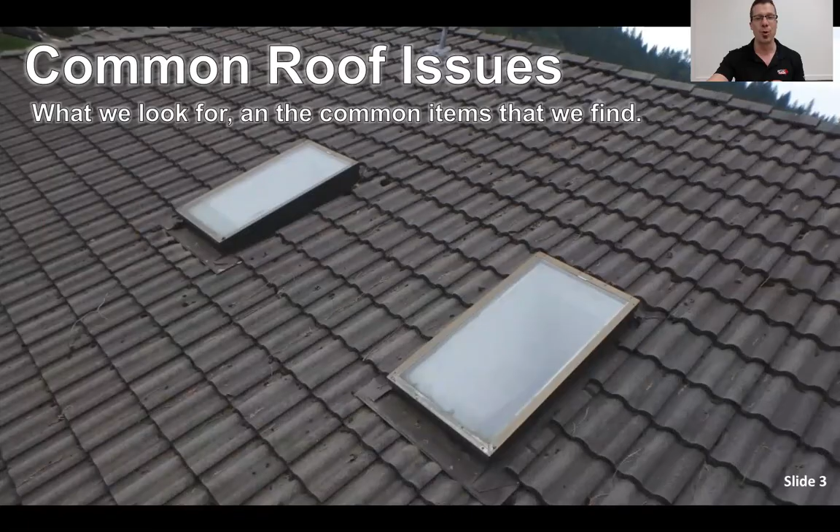So let's start with the common issues found on the roof, and let's learn a little bit about it. When you look at a roof, often all we see is the covering, but there are plenty of components to this roof: all the penetrations such as the skylights, the chimneys, all the vents. There'll be plumbing stacks, venting from your kitchen fan and your bathroom exhaust fan, but we're also going to talk about the gutters, the internal built-in style or the external one. We'll be talking about caulking as well, and also issues we find on brand new roofs.

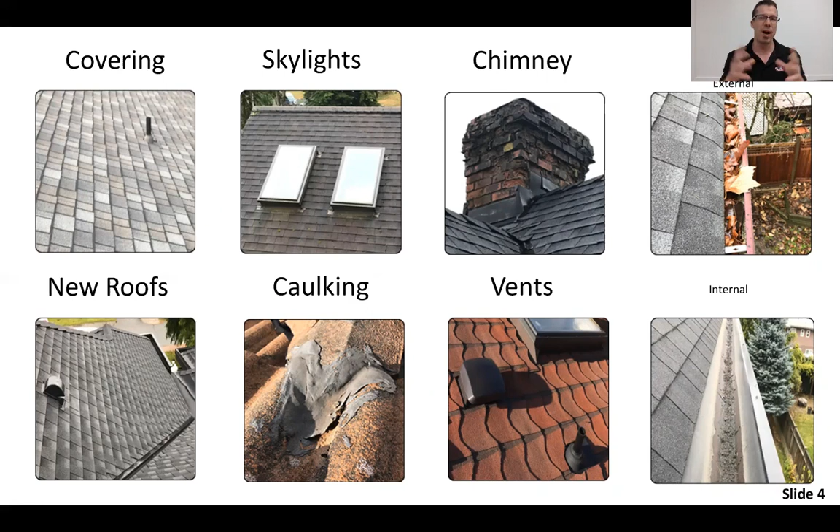But first, let's start with the skylights and penetrations. So let's look at this first video.

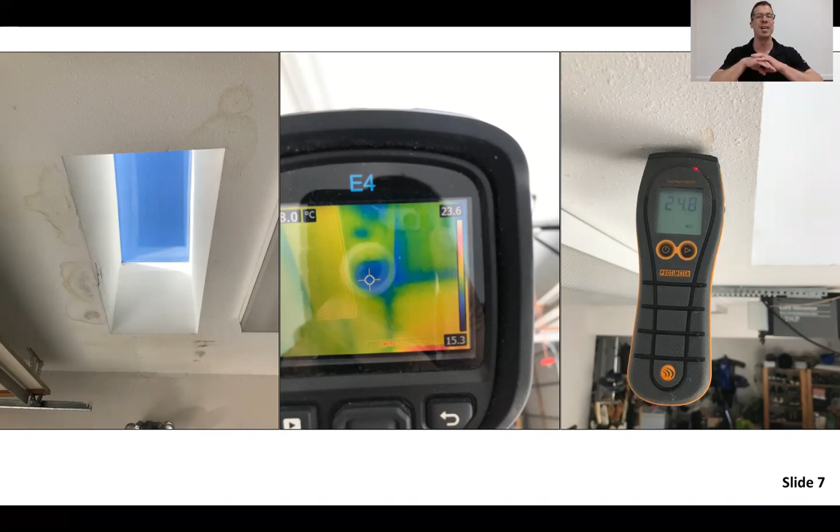So when we do our home inspection, we always start with the outside and then the roof. But once we get inside, that's when we can really see if there are any issues. On the left here, you can see in that picture that there's obviously water stains around the skylight. But is that old? Did the caulking they put up there fix that leak? Maybe, maybe not. So then we want to check it out with our infrared camera to see if there are cold spots. As you can see, there's definitely some cold spot where the blue color is. But that could also be a lack of insulation up there — insulation on skylights falls over all the time. Then we finalize this with our moisture meter. We stab the drywall, and it obviously shows us that it is an active leak. It is fully wet right now, and that will need immediate attention. So that always goes in the report.

Now let's take a look at this next video. I'm here on this roof, and I'm looking at these skylights. First of all, they all have moisture between the panes. Not the end of the world — it's an old skylight, it will happen on every skylight. But what I wanted to talk to you about here is this.

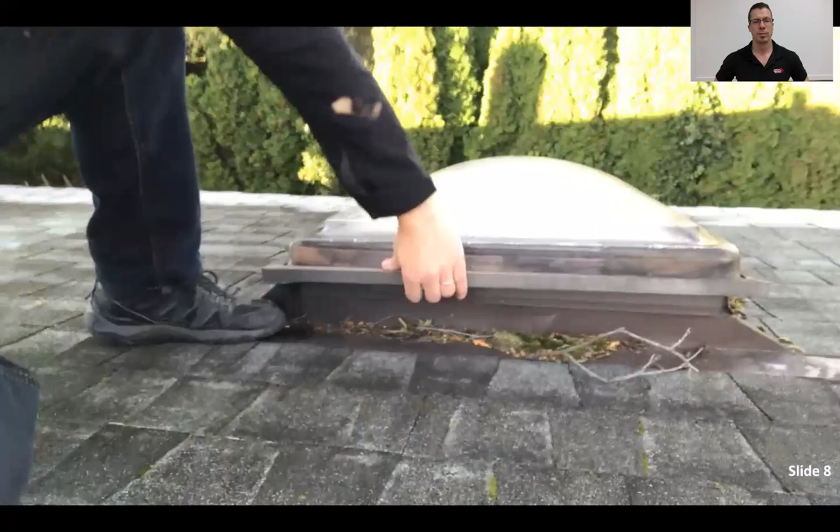We've heard stories that in really bad windy weather, if someone opens the door inside, these could pop right up and fall off, kill somebody. It's definitely dangerous, but it's a super easy fix. You just need to put two screws on each side right through the flange there, and now it'll be nice and secure. It's unfortunately a very common problem that we see on roofs, and it shouldn't even be.

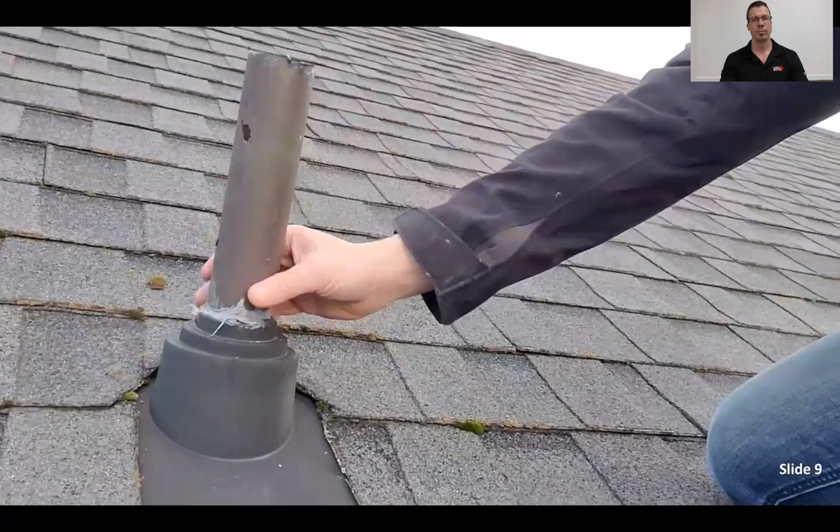So in this next video, let's learn a little bit about plumbing stacks. I'm on this roof here checking all the penetrations, and here we have a plumbing stack. At the time of construction, this was coming off the roof, then they put this rubber thing here that we call a boot. It goes from the top, it's kind of pressure fit. Some guys throw caulking on it, but normally you don't really need to do that. Then you put your shingles around it, and it's all waterproof.

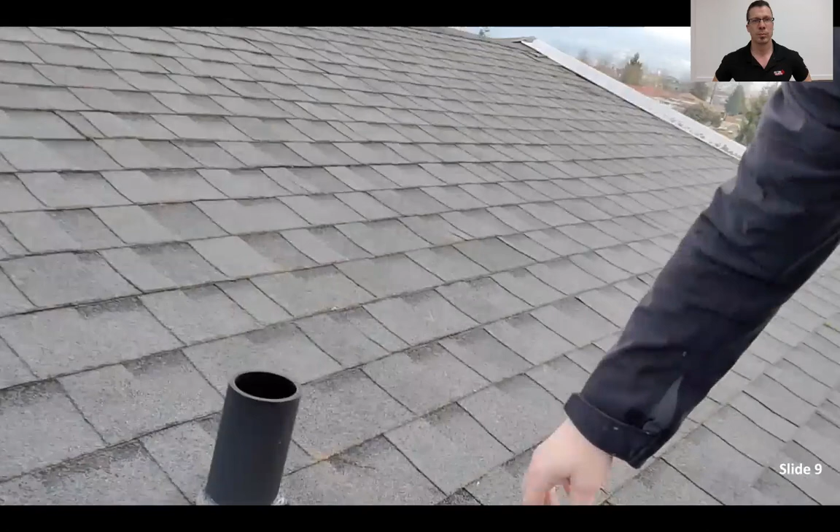But when you come to this one here, you can see that the boot is completely deteriorated. There's a hole right there. There's absolutely no doubt there's water getting into the attic from this.

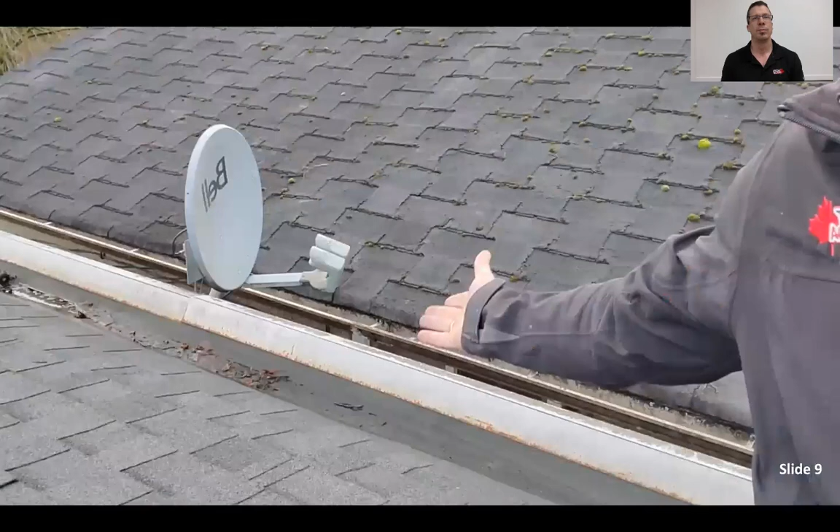So this is a really good reminder that once a year, go on your roof. Here the pitch is basically super low, so it's very safe to walk on. Go on it, see if the gutters are loaded with garbage or water standing in there, if your boots are in good condition, if some of the shingles flew off in the wind.

Very important - if the homeowner is either elderly, maybe afraid of heights, or just doesn't want to get on the roof, it's very important that they get someone up there. Most importantly, find someone that is not a salesperson. You send a roofer up there, he'll tell you you need a new roof. But if you ask a home inspector instead, we have absolutely no gain or loss whether you replace this roof or do any kind of repairs. We're completely unbiased. We can go there, check it out, and give you a full report about that roof.

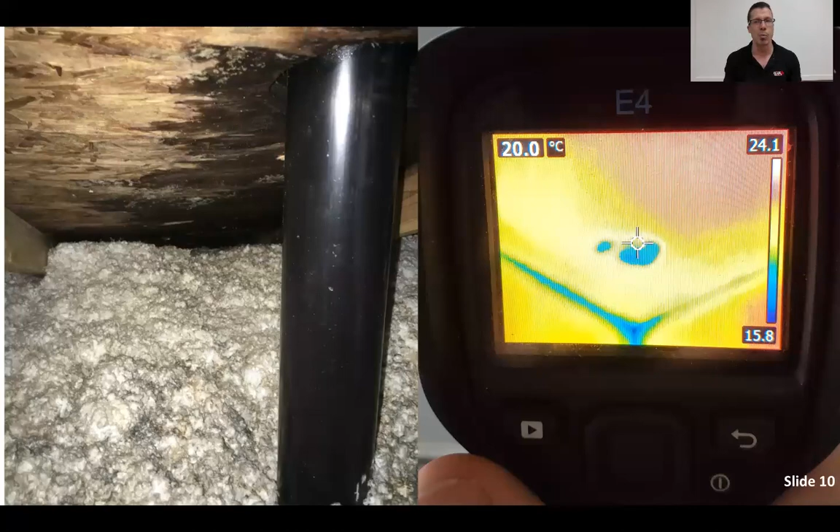Now, once we get inside, I'm checking in the attic. I can see that this plumbing stack is obviously leaking. The sheeting's absorbing most of this water, and that will turn into mold in no time. The dripping that happens once in a while when it's raining, the insulation is absorbing a whole lot of it. But we can see on the right with the infrared pictures that it is starting to create a cold spot. There was absolutely nothing visual on the ceiling there, but with the infrared camera we could see it. So keep in mind, we use the right tools.

Now, chimney issues - chimneys do come with a whole bunch of issues as well, so let's look at this. I'm here on the roof just by this chimney, and I wanted to give you a little bit of information about that. We always like to see a chimney cap, sometimes called a rain cap. There are many benefits to it.

One is that it prevents water from getting inside your chimney and rusting the metal damper that's down there. They can also come with a mesh around it that prevents animals from getting in there, or bees or anything like that that could create problems. But one really good feature is that if it's really windy out there and we have a downdraft, it can always push the smoke back inside the house - but if you do have a good chimney cap, it will prevent that.

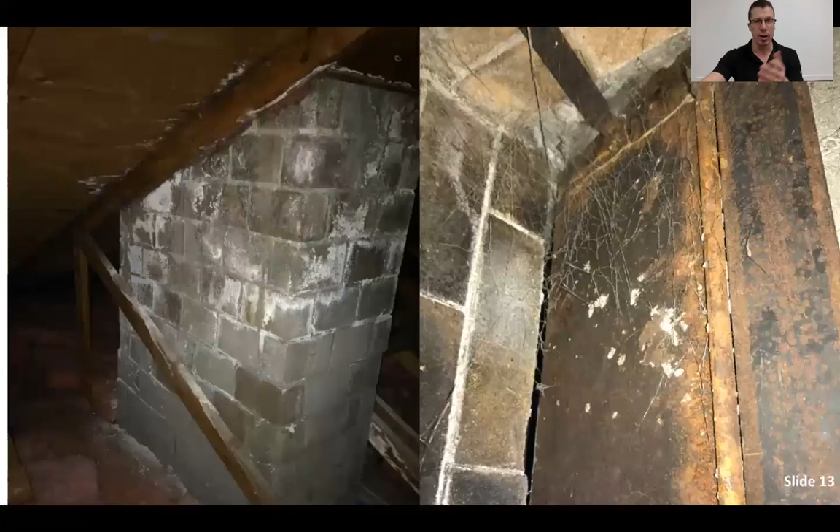So as is right now, we see chimneys like this all the time, and we'll have to put that in the report to add a chimney cap. What's happening is I find that often these chimney caps, along the years, will start rusting. They get kind of all beat up, and eventually they fly off and nobody replaces them. So if you take a look at these next pictures, on the left you see all this white powder kind of on the chimney.

This is inside the attic. This is called efflorescence. Efflorescence happens when moisture goes through the brick. It captures the salt in the concrete and that brick, and then when it reaches the edge, the water evaporates and the salt stays there. You'll see that in underground parking everywhere. You'll see this white powdery substance.

It's called efflorescence. So at this point, we know that this chimney, there's water going into it. It's going through the walls. It's going to deteriorate the bricks. But the bigger problem is it keeps adding moisture inside the attic.

Now, there's one thing to remember here, that moisture is the number one enemy of any attic out there. You want to prevent any water entry at all costs. So every time you have moisture going through these bricks, it gets in the attic and adds moisture.

But not only that, as you can see on the right there, this is not a great picture, but that's the damper of a fireplace. So if you would open a fireplace and look up there, you'll see there's a little hood, basically a little door that opens so that when you run a fire, you open it up so the smoke gets out, and when nothing's happening, you close it so you don't lose all your heat out. But when the rain drops on it, they rust like crazy, and then they're jammed up. So now basically this fireplace is not usable until you fix that damper.

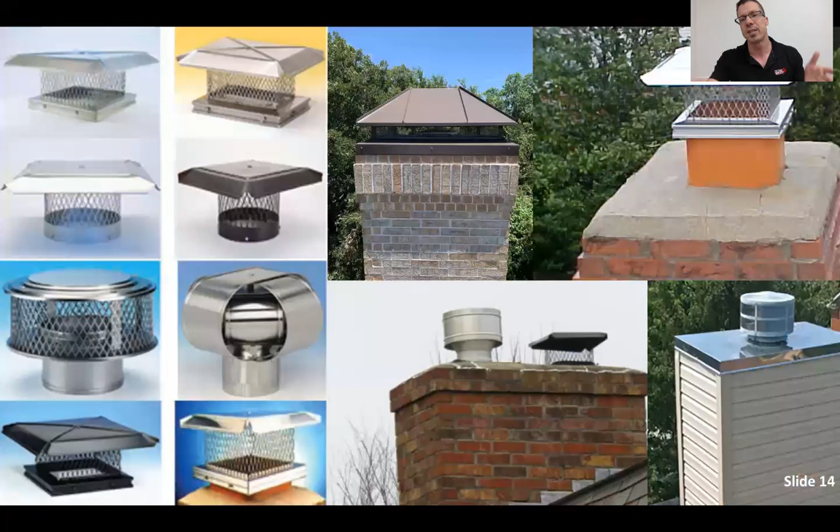So quick fix, you throw one of those beautiful rain caps on top. All the ones there on the left, they're all under $100, and it's close to a do-it-yourself. If you can go on your roof and you're a little handy, you could go up there and easily install that yourself. If not, get a handyman or get a roofer to do it. They'll go up there, put that up there, and then you're going to save yourself all these problems. If you want one that looks really nice and adds character to your home, you can do something like the middle picture. There's all kinds out there. If you Google it, you'll see there's a million different types, but you don't have to go expensive. Under $100, get a rain cap. You can get that at Home Depot, install it yourself, or get someone to do it.

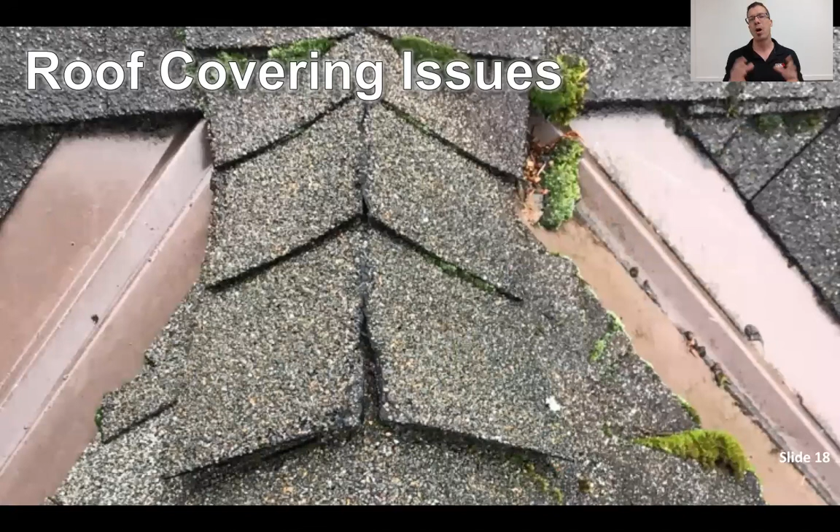Now, how about roof covering issues? Those are issues you can often see when looking from the outside or from the street. You'll be able to tell if the roof is old, newer, or just about to need replacement. Let's look at this first video.

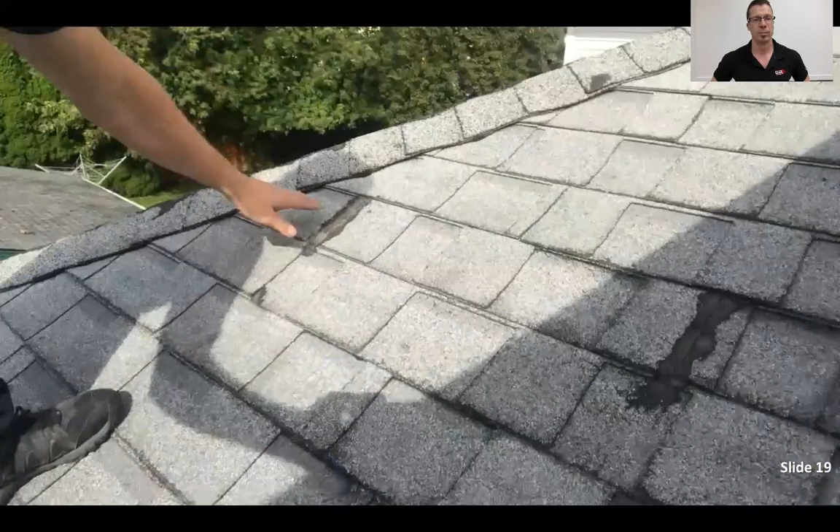I'm on this roof. I can see it's fairly old, I'd say over 20 years, and it has tons of prior repairs. I'm glad they're keeping up with the issues, adding a lot of caulking and tar all the way along. I can show you a couple more areas - you can see this whole valley is being caulked, and this corner was probably taking on some water. They tried to fix it, but that didn't quite work out.

So when you see something like this, it's a really good indication that it's time to replace the roof. Why keep doing repairs, creating problems below, when you know you need to replace it anyway?

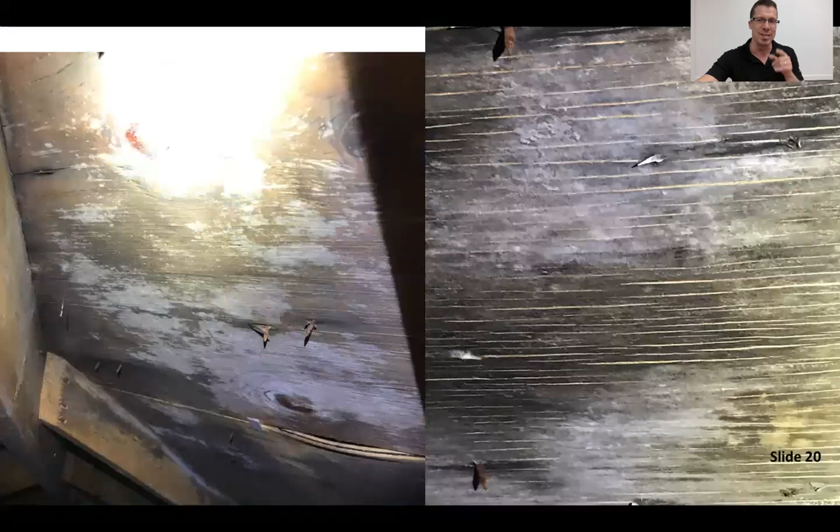Absolutely. We see this very often with investors - they try to stretch the lifespan of the roof as far as possible because tenants aren't calling to say it's raining in the kitchen, so they think everything's good. But what's happening is this: whenever these roofs get very old, they start taking on a lot more water, and the attic starts getting completely molded. You can see how fuzzy this is.

Right now, instead of costing about $10,000 to replace that roof, it will most likely cost $30,000 because the sheeting needs to be replaced - it's deteriorated in many areas. And all this mold, during this whole time people are living inside the house - there's nothing good about it. So if your roof is getting old, stop doing repairs, just replace it. It will save a lot of money and it's a lot healthier for the people living there.

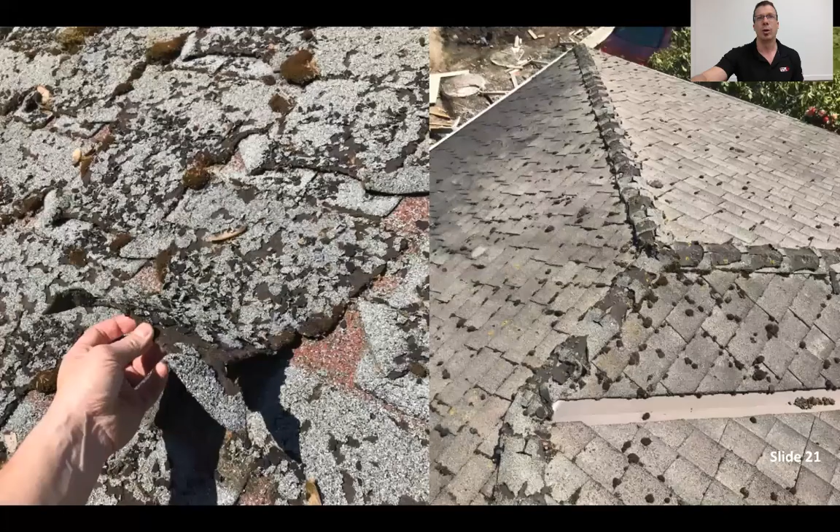So here are a couple other pictures of some super old roofs that should have been replaced 5-10 years ago. If you're going to list a property, look at the roof - you can know for sure there's probably mold in the attic if it looks like that. So keep that in mind.

It's all about the maintenance. Moss is a big roof killer out there. It keeps the roof wet at all times. It tries to get in between the shingles, and it's not very difficult to get rid of.

There's all kinds of products they sell out there that you can either sprinkle on your roof, or you can get some specialty companies to come and clean up your roof. But you got to make sure that whenever this gets removed, it doesn't go in your gutters. You have to clean up the gutters right after as well. Otherwise, it creates other kinds of problems.

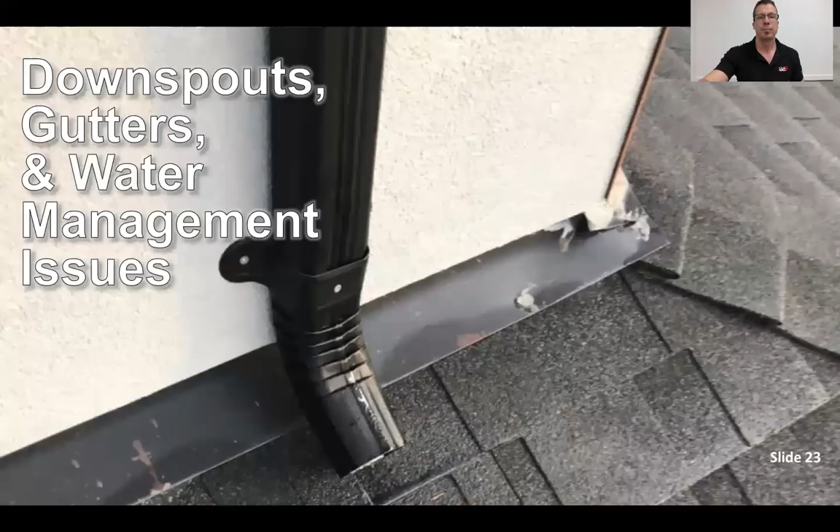Now let's look at downspout, gutters, and water management issues.

I'm here on this buyer inspection. I'm right on the roof, and I wanted to show you a little quick something. So we can see right here that we have a downspout discharging right on the roof. First of all, it's a very bad idea. It's going to deteriorate the shingle a lot faster than it should. You should have a downspout all the way down into the gutters.

The second thing is you don't want to have any of your wall finish or your trims touching the roof. Otherwise, that water is going to hit it and just deteriorate it. So here, take a look at this trim here. The bottom is touching the roof, so everything is completely rotten. In reality, this should have been cut about 1 inch to 1.5 inches higher than the roof so the water doesn't touch it.

Here's a situation again of, there's a difference between knowing how to do something and knowing why you're doing it. So obviously they had a carpenter on site. They say, hey, go put some trims there in that corner, it'll look nice and pretty. The guy is super good at cutting wood and making angles and everything, but he's got no idea that basically if water runs to it, it will absorb it, it will wick this water up, and it's going to start deteriorating it.

So very important, whenever you have a roof, if you're going to get some work done on it, you have to have someone double check it. Otherwise, you're going to get things like that.

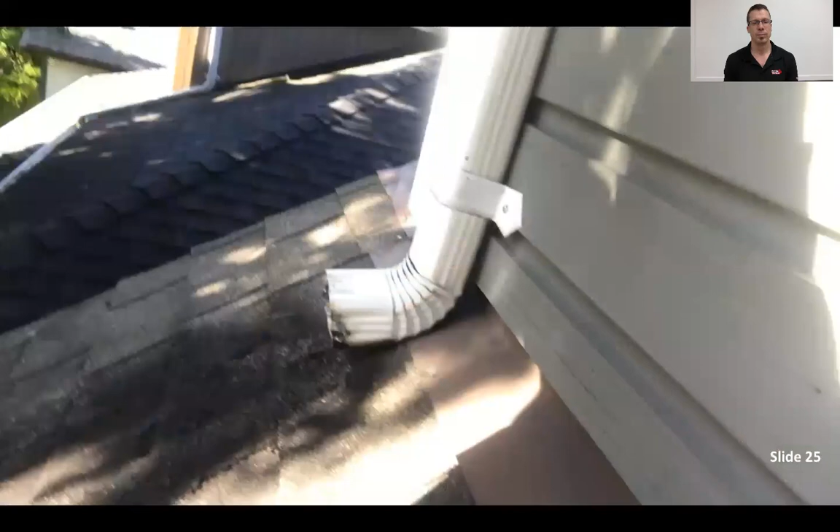Now, let's look at this video. I'm here on the roof, and I wanted to show you a little something that could save you a lot of money. So if you look at this roof here, it's not a brand new roof, but it looks really good, it's in really good condition. And then all of a sudden, you see these downspouts discharging on the roof, and it's completely destroying this whole area.

So we always recommend extending the downspout into the gutters so that this section of the roof is just as good as everything else. Right now, the roof looks great, but this whole section is completely done. So if you have a roof and your gutters are discharging on the roof below, get that fixed. Add an extension to your downspout right into the gutter, and it'll save you a lot of money in the long run.

Absolutely. So, you know, some people might think that having a downspout on your lower roof looks kind of weird, but there's other things they sell. They sell tracks, about 3 to 4 inches, very shallow, and they're the same color as the roof, and you won't even see it.

There's also some shingle manufacturers out there who will not cover the warranty if there's water discharging on the roof right there. When they tell you this roof's going to last 20 to 25 years, it will not last 20 to 25 in those sections. It's like it's getting massively abused. So make sure that the proper installation is done to make sure that this roof lasts as long as what they told you it would.

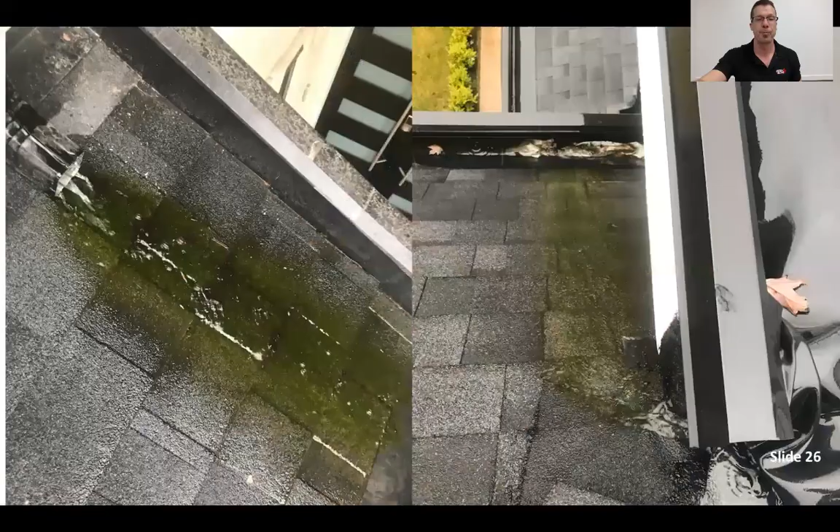Now, here's a couple pictures. You can see in those pictures that it's getting all green. Even when it's not raining, it's going to stay wet in those situations, in those locations, because of that gooey green algae that's growing there. And it's going to deteriorate these sections in no time. So next time you go on your roof or you get someone on your roof, make sure they check this out, and if they're not installed, to install them.

And I'm here on the roof in this beautiful area, a lot of trees. Who wouldn't love to live in the forest? Well, I would love it. But what you gotta keep in mind when you're gonna move where you have a lot of trees around is to keep up with cleaning the gutters. When your gutters get filled up with leaves, pine needles, all kinds of garbage, water piles up in there.

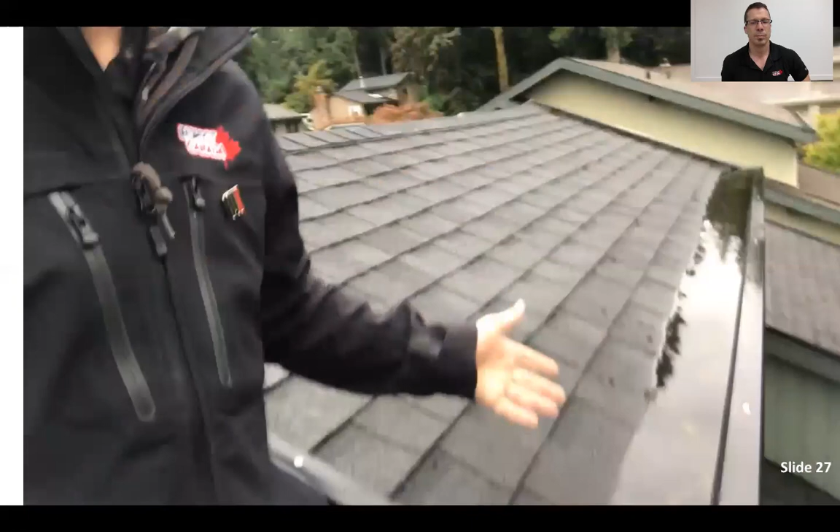Here's an example. This is an internal gutter. There's one there, you look, another one over there. It's all loaded. And here's an example. So when they overflow, now it starts dripping right here. It's gonna deteriorate this entire corner. It's gonna be a lot of work to repair all that. The easiest way to do it, once a year, you come up here, clean up the leaves.

Absolutely. So what happens is when those gutters overflow, this water runs on the fascia, deteriorates this fascia, then it hits the lip at the bottom, and it wants to get on the soffit. It deteriorates the soffit. Then it starts dripping down right by your foundation, increasing the chance of getting some water getting inside your foundation walls.

And also if there's some sidewalks there, this water falls all over. It's going to soften the soil, and then it's going to go click, click, and it's going to start cracking. And that's why you see houses and their sidewalks are all over the place, because of poor water management.

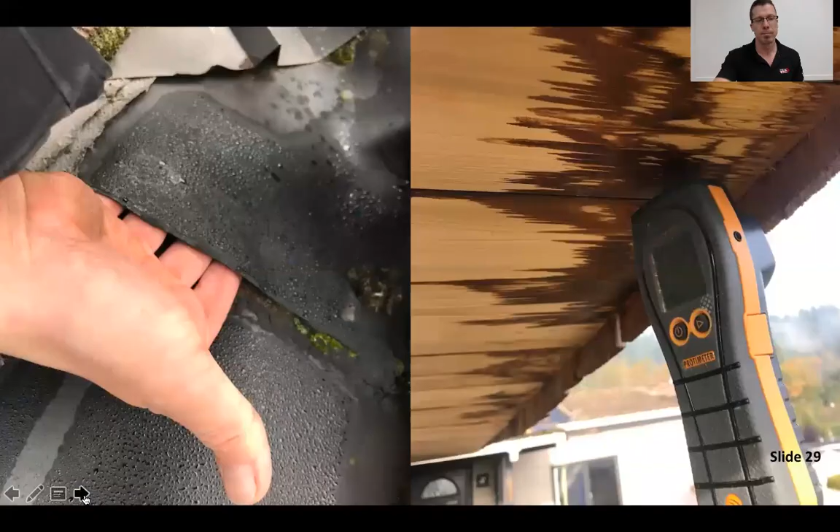Here's another one. So basically here you can see, oh, I'm going to show you this other video here. I'm here in Richmond doing this massive home inspection, and I'm on the roof. And these houses, like many other houses out there, there's really 2 types of gutters. There's one that is an external gutter that you normally see, and there's the built-in gutter, the one that you don't see, that comes like with a membrane.

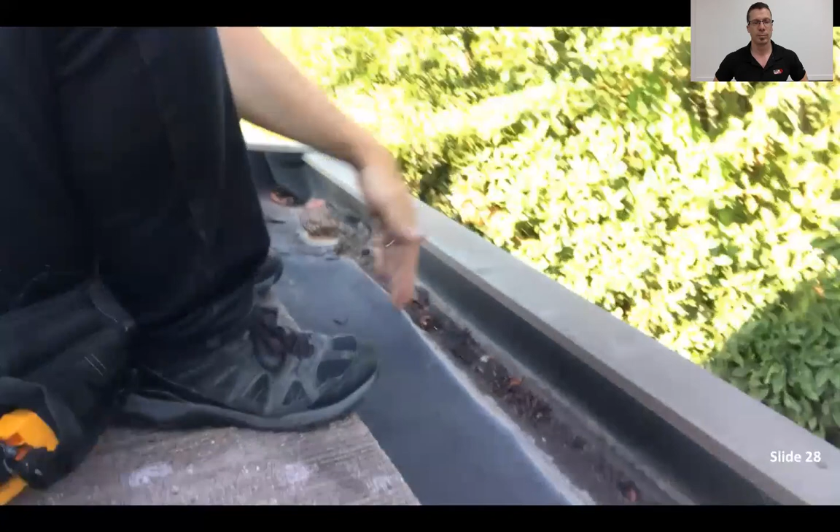What I'm not crazy about is this membrane. A regular gutter, if it drips, if it has a hole, you see it, drip drip drip, it keeps coming, and then you see it, you go put some caulking on it, fix it, call it a day. But this one here, this type of membrane, if you see right here, it's super deteriorated. You know, it's cracking pieces like this. Water's gonna get in there, and when water gets in there, it damages the structure.

So it's really important to keep up the maintenance on these gutters. We'll throw it on the report. Absolutely. Internal gutters - the issue that I have with this is that because you can't see them, people think that they must be in good, great shape, when really they do need some massive maintenance. If someone goes on the roof every year, make sure that the seams are nice and tight, that there's no water that gets in between, that they're not all cracking and getting all dried up. Because the problem with them is when they leak, often it creates either structure damage or damage under the soffit.

An external gutter, when it drips, it basically drips down, and then you can see, okay, I'm gonna put some caulking there and fix it. But the internal one, you only see the issues either when water is dripping through the soffit or when you get on the roof. So here's a couple pictures.

As you can see on the left, I can fit my whole hand there in between the membrane. So water is getting in there. Every time it rains, water gets in there as if there was nothing. And here's another example in that picture on the right, of a very early stage when it's just starting to go through the soffit. After a while, the soffit will be so deteriorated, it'll fall right down. It's gonna cost quite a bit to repair this whole section.

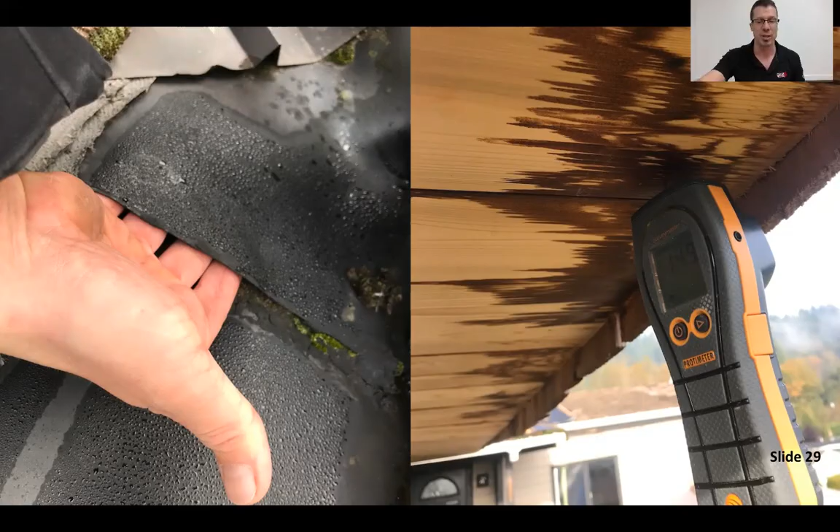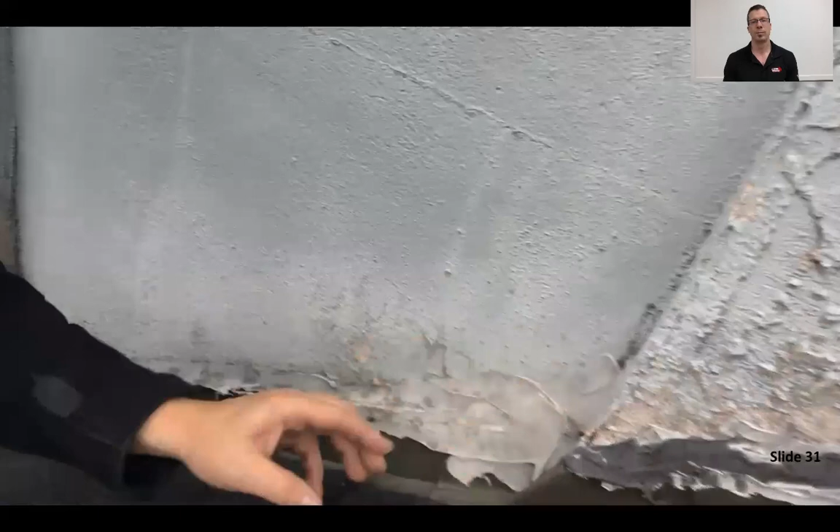The concrete tile roof will last 40 years, and they last all kinds of ages. But keep in mind that there are other things on that roof that will not last as long. For example, caulking - as you can see here, it's starting to separate, so you'll get water coming down and getting inside there.

I was just told by William inside that there's some water stains right by the chimney. Caulking on the exterior should be replaced every 5 years, so keep an eye on it. If you see it starting to peel off or having gaps and openings here and there, shave it off and put some new caulking. That will extend the lifespan of everything else and it won't be leaking.

When I say 5 years, depending on sun exposure, if one side of the house gets a lot more sun than the other, this caulking will definitely deteriorate a lot faster. So when you do your annual maintenance, go up there, see if there's any crack, if it's all dry, if it's starting to peel off. Shave it off, put some new one on, do a nice job, and you'll be preventing any kind of issues with leakage in the attic or on your ceiling below.

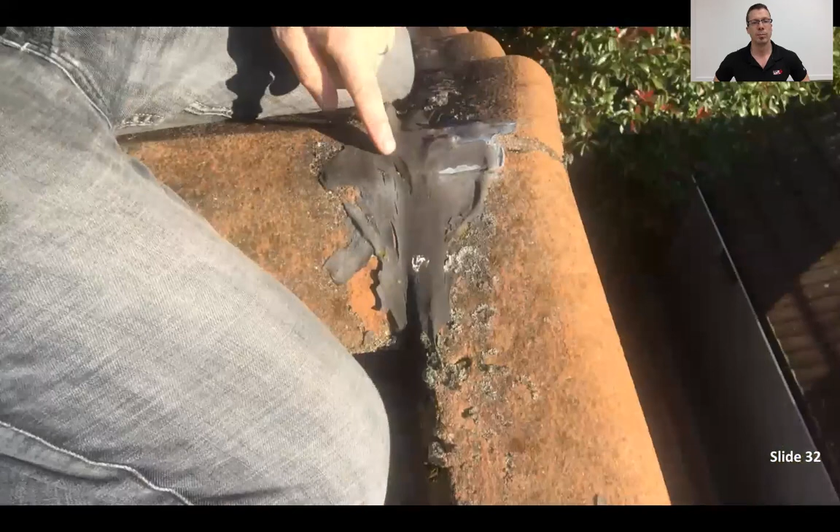I'm here on this concrete tile roof, and I wanted to talk to you about the importance of keeping up with the caulking. Concrete tile roofs - every time there's no possibility of adding a tile on top of another one, they throw caulking, just like that. Eventually this caulking, like every other caulking, needs to be replaced and maintained. In this case here, the water gets right into this crack, and see what happened to all the fascia board - the whole thing is falling apart.

This is just annual maintenance. When you have a roof, no matter which type it is, it's important to get a guy up there to make sure everything's in order. Otherwise, deterioration is going to start happening. When the caulking gets dry, as you can see there on the fascia, it needs a full replacement. Now it's all deteriorated - it's been running like this for way too long. If someone did some annual maintenance, they would have noticed this, filled up this gap, and this fascia would look just as pretty as it was on day one.

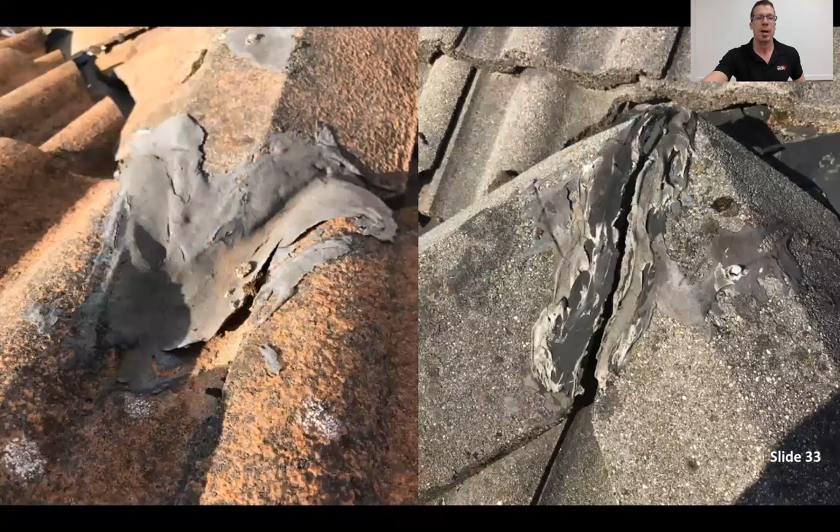Now here's a couple pictures of some caulking or sealant on those concrete roofs that is deteriorated. On the left, you can see an opening - obviously when it rains, it's pouring into the attic. On the other side there, you get a separation. There may be another tile under there, but obviously this caulking needs to get redone.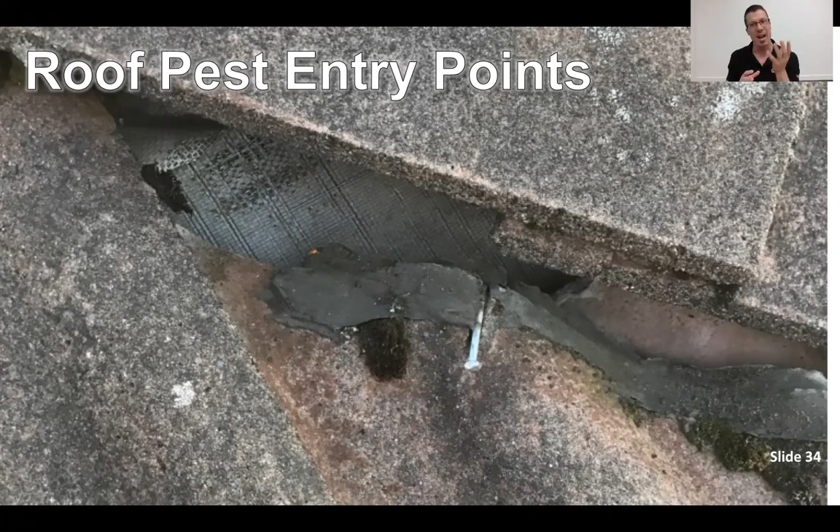Now, in this next section of this presentation, we'll talk about roof pest entry points. Oh, look at me there - I'm up on this tree right here. Actually, no, I'm actually on the roof. But if I was a rat, this is the attic I would want to be into. Look at the beautiful access on the roof through these nice trees all over the place.

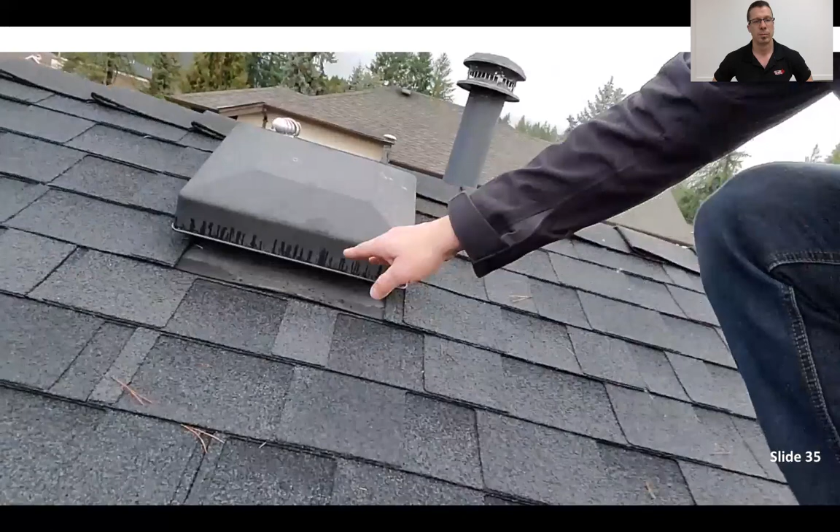This is the easiest roof for any kind of rodents to get into. They're gonna take the little shovel and dig a hole right down here, and get right in your attic, make a nice little family in there, make some tunnels, trails, a bit of droppings here and there. So if you don't want the rats to look at your roof and say 'that's where I want to move in,' make sure you get rid of all these trees that are touching your roof. They should be a couple feet away because they will jump. There's nothing good about having any kind of vegetation touching your walls or making it all the way to the roof.

Basically, in windy weather, the branches will be scraping all the material and it will deteriorate the roof. It's obviously a direct access for pest activity. It also keeps shade on your roof and wall - they stay wet at all times and it creates more deterioration. So if you have any kind of vegetation around your home, we always recommend keeping it a couple feet away from the walls so there's an opportunity for the air to dry behind it, and it also prevents pest activity from getting on your roof.

In this next video, I'd like to talk to you about those cute little raccoons and what they do with these cute little hands of theirs.

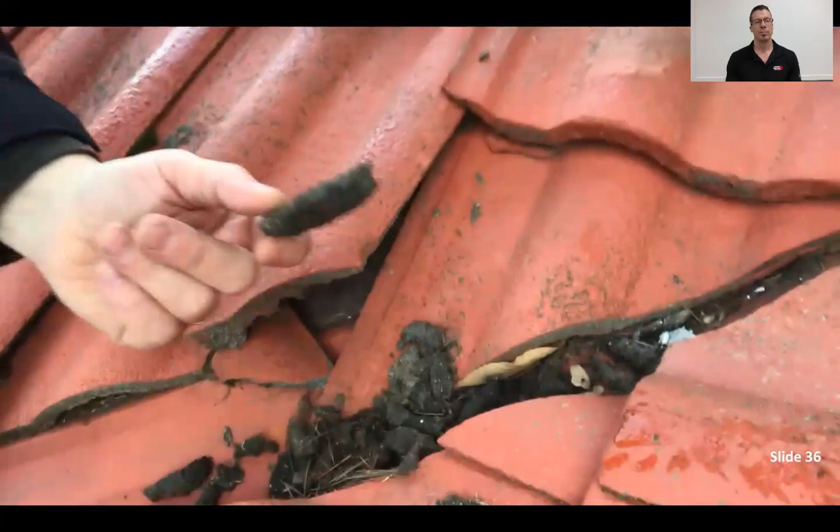I'm here on this beautiful clay tile roof. Looks great, they do last a very long time, excellent type of roof. But the first thing I notice here is some droppings that are pretty decently big, which makes me think it's a raccoon.

Raccoons can actually take these tiles, move them, and make a hole to get right into your attic. Sounds kind of crazy, right? But here's an example: this tile's been pulled out of the way, so now there's an opening right there, and if I showed you inside, there's all kinds of droppings in there.

Once I get in this attic, actually I'm not sure if I have access in that one, but long story short, it's loaded with droppings, pest activity and raccoons.

Raccoons don't fly and get on your roof. They also need a tree or a fence or something almost reaching your roof. Around this house there were 2-3 trees right against the house, giving perfect access for these raccoons and their babies to go up on the roof and find a nice safe place to live. So again, if you get rid of the trees around this house, you basically get rid of the raccoon.

They won't climb on stucco or anything like that. But in this next video, I'd like to show you that even if there's no trees around your house, there's still a possibility to get some pest activity.

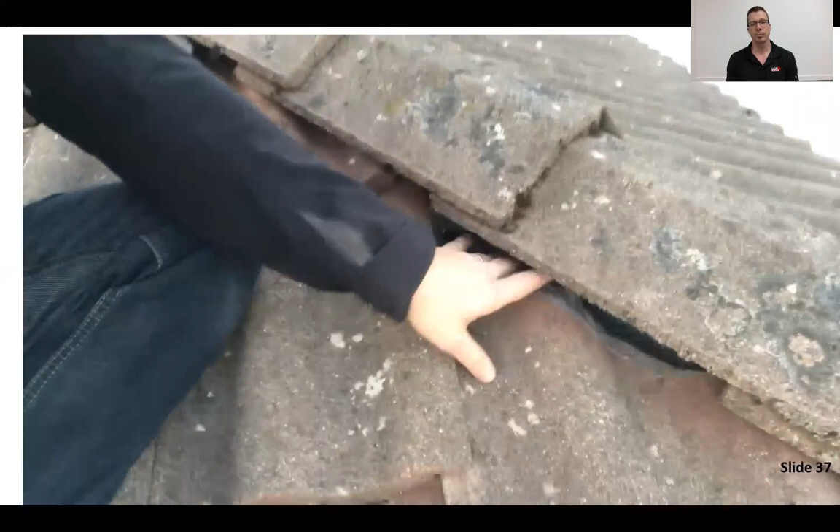A couple weeks ago I made a video about raccoons who could take tiles on the roof like this, move them, make a hole, and get in the attic. I'm not 100% positive what's going on here, but this tile has been pushed down, and now there's an opening here, and I see one of these guys here. So I'm thinking, and I've seen it before...

Pigeons will peck their way into a roof as well. I'm not sure if this tile was already slid down - I doubt they could move it, but I know they'll poke through the membrane and get inside. Once I get in the attic, I'll know a little bit more.

But keep in mind, if you have a concrete tile roof, go on it once in a while, take a look. And if you're not going to do it, get somebody else to do it - 100%, you need someone to go and check these things out.

Pigeons will get in your attic, they'll find a spot, they're going to have droppings everywhere, and sometimes they make these massive big nests in your attic too. If you go up on your upper floor and hear coo, coo, coo, there's nothing cute about that. Get the pest control company in there so they can get rid of them, just like the rats.

There's a fungus that grows on their droppings that gives lung infections, and some people can get really sick from it. If you have pigeons, nothing good about it - make sure you get rid of them.

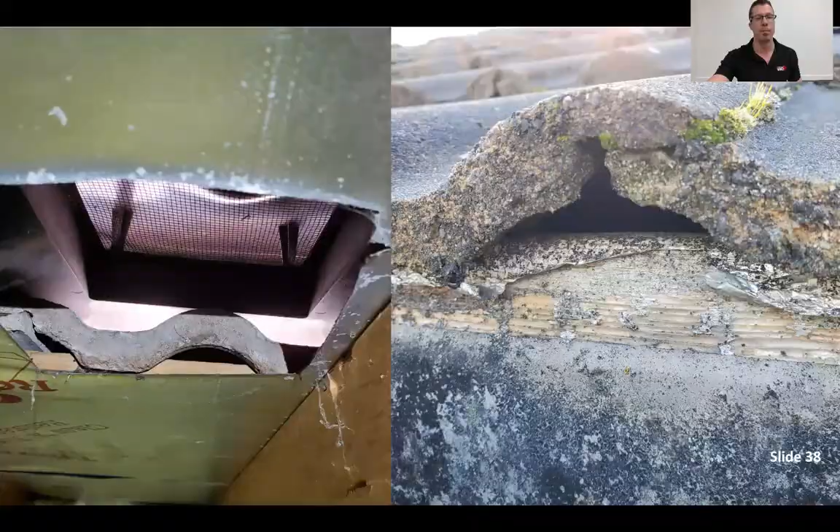Now those concrete tile roofs, the wavy style one, every time you put a roof vent it's going up and down, so it creates openings all the time. And wherever there's an edge, you can see that wave opening, wave opening, wave opening - it creates a crazy amount of openings for any kind of pest activity to get into your attic space.

Every time I do a home inspection on a home with a concrete tile roof that's the wavy type, I'm almost guaranteed there's going to be pest activity in there. And you can imagine too, if you've got like 300 openings like this on your roof, are you going to spend 3 weeks trying to cover them all up with mesh or expanding foam or something? No - it's really tough to control pest activity in the attic with this type of concrete roof.

If you're going to go concrete, because concrete is a really good roof and lasts very long, you want to go with the flat concrete tile and not the wavy style, unless they have another specific way of installing them so it doesn't create openings.

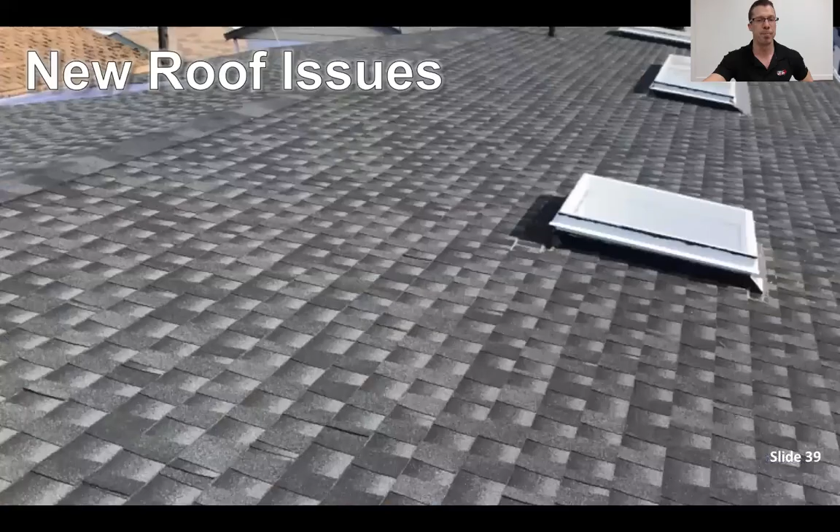From what we can see, it creates a lot of openings very often. So now let's talk about new roof issues. You would think that a brand new roof should be perfect, that there should be absolutely nothing wrong with it. Sure, there will be no wear and tear, but what we find is mostly poor craftsmanship, unfinished projects, or really crazy little things.

Let's start with this video right here. Home inspection on this brand new home. Yes, brand new and super big and very beautiful in this neighborhood that is popping a new house every couple of days. So should you get a home inspection on a brand new home? I don't know, I'll let you decide on that.

So I'm on the roof right here. This whole section of the roof, the flashing is completely missing. It's an unfinished project. And that's not the worst. Actually, this whole portion of the roof doesn't even have any water to drain away. So look at it, here. You'll have ducks in there in no time. Hey, might as well throw a fish in there as well.

So, should you get a home inspection done on a brand new home? 100% you should. That is a guaranteed fact.

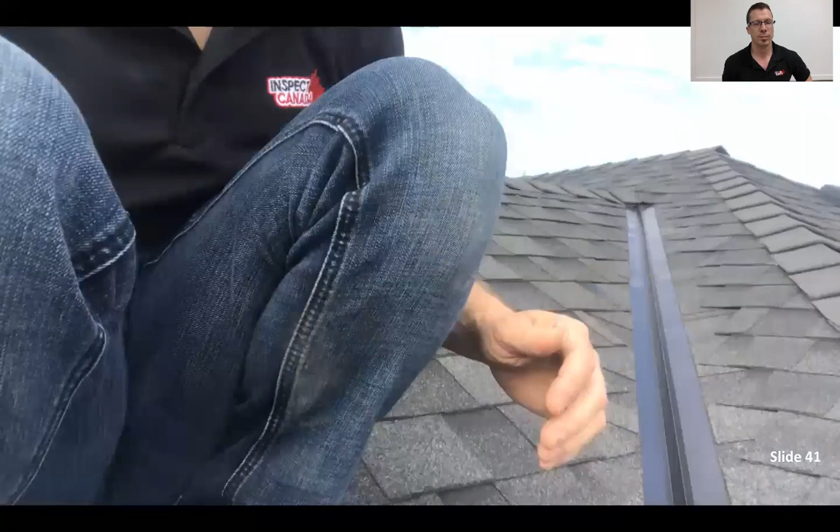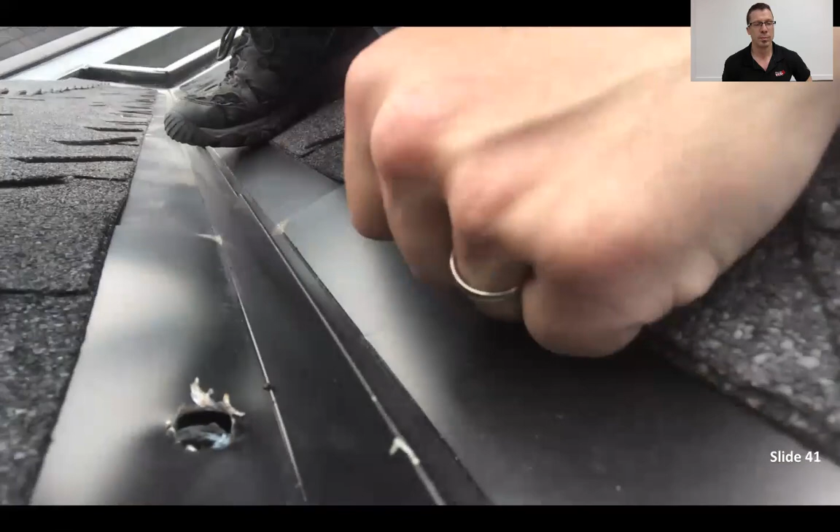Now let's look at this next video. Doing a home inspection here on a brand new home, brand new roof, you would think this would be in really good shape. But you know what happened? Once in a while, some of the subtrade will make a mistake and they don't want to get in trouble, so they might not mention anything. So here's an example. Brand new roof, and look at the hole that we have right here in this roof. It's about 5/8 of an inch. Water's gonna get in there.

So should you get your brand new home pre-inspected or inspected? 100%. When I was about 20 years on construction, I've seen tons of stuff like that where, you know, guys, they'll do something like, for example, in this situation, an electrician probably wanted to poke a hole through the roof to run a wire and then bam, realized they threw it right through the flashing. And they're like, oh my God, now they're gonna need to replace this flashing. In order to replace it, we need to peel off all these shingles. It's gonna take, you know, whatever time, and it's gonna cost thousands of dollars.

Let's just keep it quiet, nobody goes on the roof anyways. Well, we do, and that is why we find these kind of items. And just for the record, I did re-inspect that later on. The builder said it was fixed, and it was not. So whenever you get a brand new roof inspected and the builder says they fixed the items, still get it inspected, because the chances are that it is not.

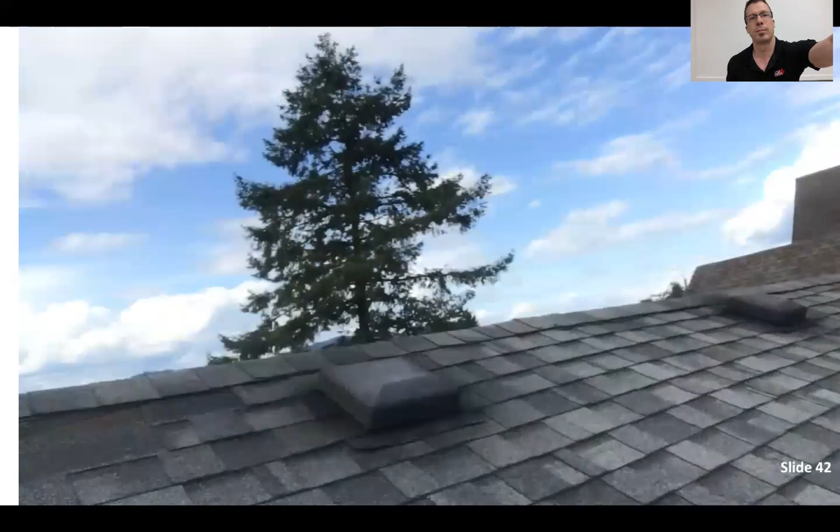Now let's keep the craziness going. I'm here inspecting this house. It's not even 6 months old. It's super new, the roof is beautiful, it's nice and clean. And then, you know, it almost seems sometimes like you might not even need to inspect it. Well, that's what the seller said. He said, well, it's brand new, what are you going to do up there?

But in reality, then I come to it and I see that right here, one whole strip of shingle flew right off. It's gone. It's basically right on the black paper right here, on the tar paper, nails, everything. So even when a home is brand new, it's very important to get it inspected.

Here's another example of that, and I'm sure I'll find plenty of other examples on this house. And you would think that this is like 1 in a million, but it's not. It totally is not. So that's where the problem is. It's not a 1 in a million, it happens fairly frequently.

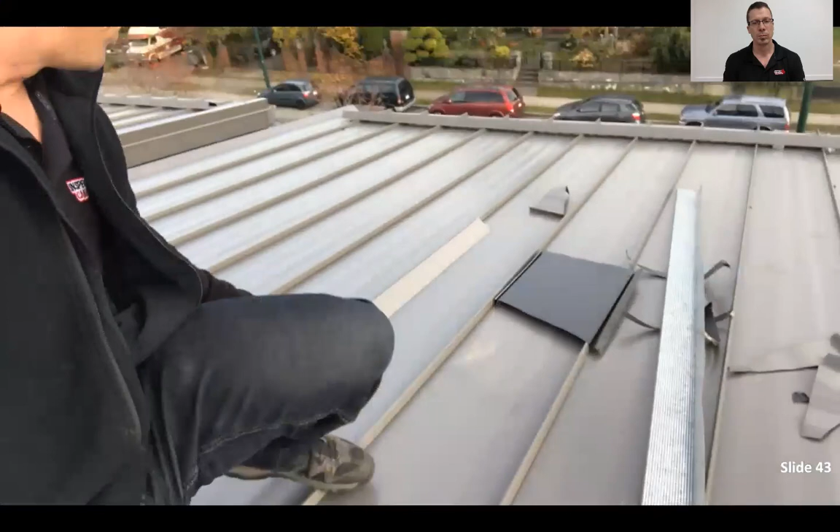And also, just a reminder that a home inspection is not all about deficiencies. The roof might be in beautiful condition, but there may be some safety issues. Here's one. We're here on this brand new construction again, on a little bit of an unusual roof, a metal roof here. I love it, I think this is gonna last a very long time, very low maintenance. But what I wanted to talk to you about here today is all this debris that is still here on that roof. This place is being done, it's being sold, and there's all this kind of crap here on the roof that could easily fly out.

And look how high we are. We're super high. This could easily kill someone down there, a kid, or anybody really. Look, it's a metal angle. This thing's gonna slice someone's head in no time.

So if you're a builder, keep an eye on your trade. Make sure that the roof is clean right up of all debris. Otherwise it's going to be a liability. It could hurt somebody. There's nothing good about it. There's absolutely nothing good about it.

And again, this is not 1 in a million. Very often we find debris on the roof. Sometimes they even leave a sheet of plywood. These things can pick up in the wind, start flying, and really create some massive damage. So site supervisors should take the time every time a subtrade is done with their work to go and verify it, and make sure that they cleaned it up properly. Otherwise, like I mentioned, this could be a lawsuit or it could even kill somebody.

Now this next section is about roof education. For us at Inspect Canada, we're not all about deficiencies. We want to educate our client as much as possible. So if we find something that is done super nicely, or a great feature, or something that will add value to our clients, we always want to let them know about it. But in this case, I got a few videos, so let's look at this one.

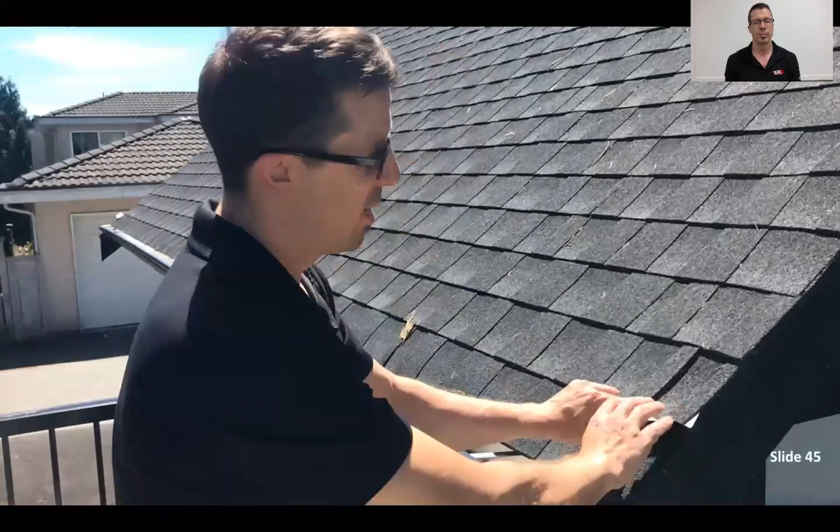I'd like to talk to you a little bit about this little piece of flashing right here. This is called a kick-out flashing. Basically, the idea with this flashing is that the water is coming down this roof, and instead of running over the fascia here and rotting the end of this piece of wood, it basically kicks the water right back into the gutter. Every time we do home inspections, we go around the house and we see the ends of these fascia boards completely deteriorated.

And all you need to do is throw a little piece of flashing up here. It's a very easy solution to save a lot of money, because when this is rotten, it's not like you can paint it. And if you cut it here, it's a lot of work to try to repair something that should be so easily prevented. So if you have a roof and you don't have kick-out flashing, consider installing them. You'll save tons of money.

So whenever I'm going to a home inspection, I look up on the roof and I see that it has kick-out flashing, and that it has downspout extending in the gutter and all that. Then I know that this homeowner is the type of person that thinks long run, that whenever they get 3 quotes, they don't go for the cheapest guy.

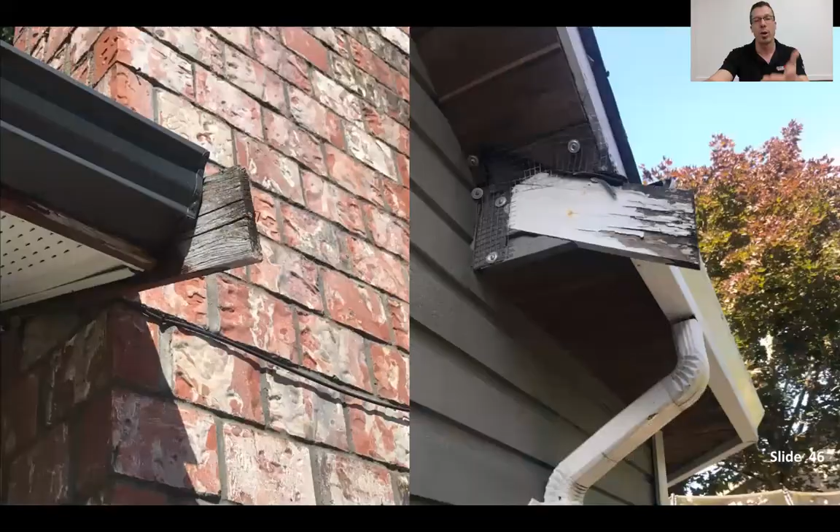But when I go to a house and I see, for example, here are those pictures, the fascia that's all deteriorated like this because they couldn't even take the time to cut a little piece of angle and screw it in the corner. They wanted to save 2 minutes. So that homeowner is the type of person that gets 3 quotes and picks the cheapest guy. That also means they probably pick the cheapest guy to install their furnace, the cheapest guy to do their paintings. They always pick the cheapest guy. So then we have to crank up our inspection pickiness to make sure that we don't miss anything.

So here's a small detail, another detail that you'll see on the roof only really if you go on it. From the street, that's not something you normally see. I'm doing a home inspection and I'm on this roof right now. There's a chimney and there's a small detail on the roof that we don't see very often that makes a huge difference for water penetration at the chimney.

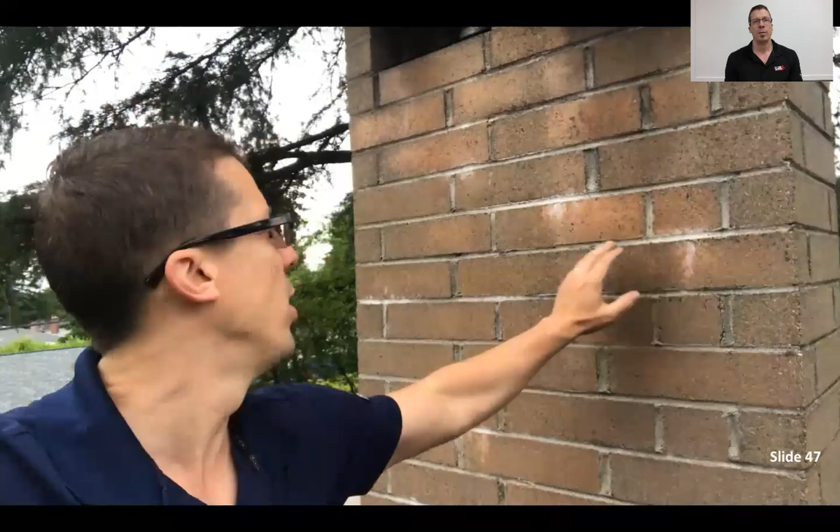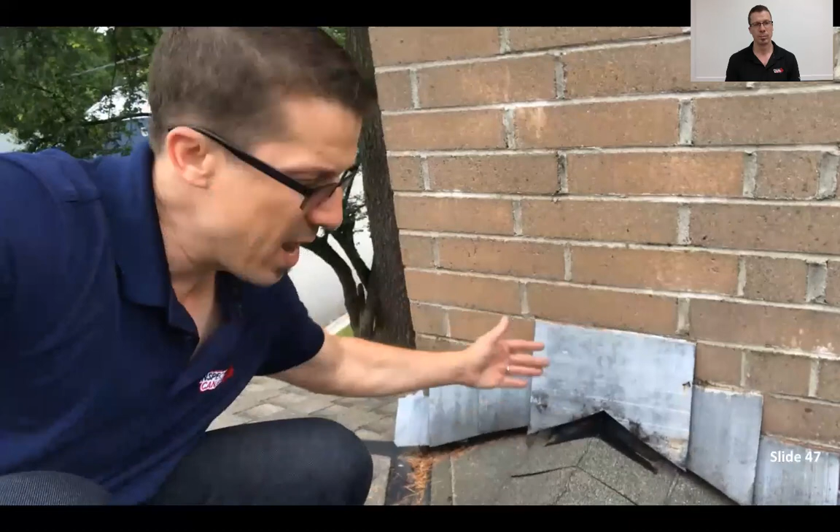So when you have a chimney that is at least 3 feet, and even if it's 30 inches, it really depends on the location. Here's 1, 2, 3 - this is a 36 inch chimney. The water off this roof is going to come down and then hit that chimney. So what they've installed here is what's called a cricket or a saddle. Instead of having the water bang against the chimney and try to find a way in, it's going to be redirected this way or that way.

So if you have a very wide chimney, consider getting a cricket installed. It will save you a lot of money in repairs.

Any kind of penetration to your roof, whether it's a chimney, a plumbing stack, or a vent, it's an opportunity for leakage. So whenever possible, if it can be done properly, you will avoid all kinds of water damage.